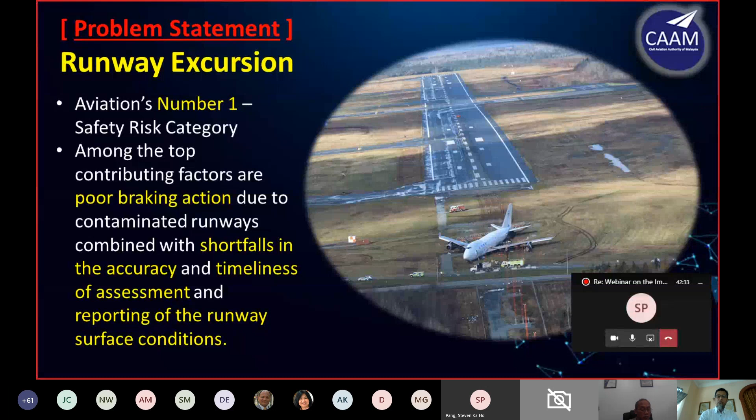What are the contents of my presentation? First, I will touch on what is RCR, Runway Condition Report. Second, I will tell about the objective of the RCR, and then benefits. What are the benefits of RCR? And then why RCR is very important. I will share a little on the challenges that we in Malaysia face when we implement RCR or GRF, and on the roles of agencies. As you know, when we implement GRF, there are various different agencies that have their own roles, so I will share a little on this matter. At the end of this presentation, I will share some ICAO provisions and guidance material that we can refer to, to ensure all the things we do are recommended or required by ICAO.

What is a runway condition report? It's a standard reporting of runway surface condition. Our airport operator, our aerodrome operator, has already done runway surface condition reporting, but ICAO, after introducing this GRF, wants to ensure all reports are in standard format. That's one of the reasons. Hopefully after this, worldwide everybody will report using the same format, enabling all users, the airlines, to understand easily because all are standardized. We don't want different methodologies of reporting runway surface condition. As we go on in this presentation, you will see it is very simple format. You don't have to write too long in words. It's very simple, so I will share with you after this.

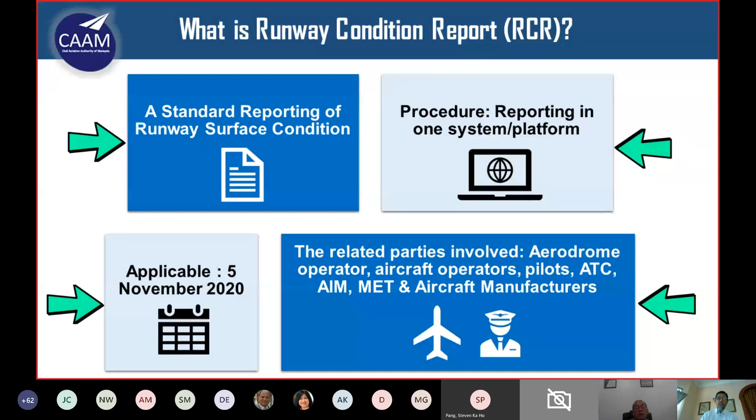What are the objectives of this RCR? The first is we want to assess and report the condition of the movement area. This is the major role played by all aerodrome operator staff, especially the aerodrome inspectors. After every heavy rain, they have to go onto the runway and do some assessment. I will tell you the detail after this of what assessments need to be done, and then they report in a timely and correct manner.

The second objective is to provide, after we have done all those assessments and measurements and produced the report, the assessment information in the correct format, which is the SNOWTAM format. The third objective is to report significant changes without delay. This is one of the purposes of GRF, to ensure we report any significant changes on our runway without delay. For example, in our region, after every rain, we will ask our aerodrome inspector or aerodrome staff to go onto the runway, do measurement, and as soon as possible, produce a report and submit it to the AIM or ATC.

Okay, what are the benefits of the GRF? First, of course, to improve safety by better understanding of runway condition. If everybody, the aerodrome operator, the ATC, the pilots, they have better condition of runway condition, so better knowledge about runway condition, so it will improve safety, thus it will affect in fewer runway excursions, like the first slide I showed you just now.

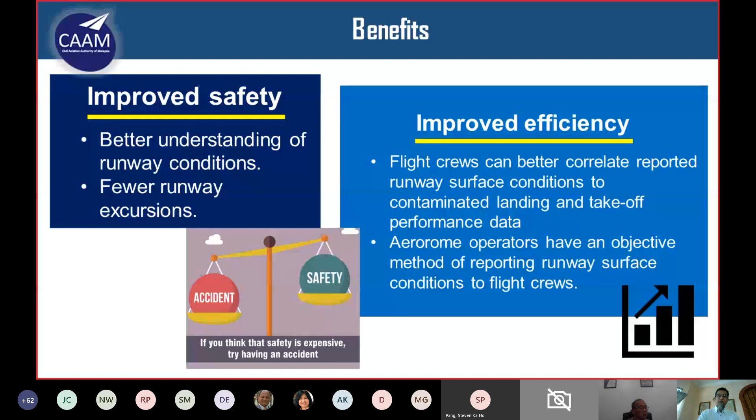Okay, why is the RCR important? First one is to standardize the reporting of runway surface condition. We will see several times, every time we talk about GRF, it is for the purpose to standardize the reporting of runway surface condition so that everybody will understand correctly.

The second one is to establish a common language between all related parties in airports with one system. Aerodrome operators communicate the same with aircraft operators, pilots, ATC, AIM, meteorology, etc. So everybody will use a common language for the condition of our runway.

Next one is to allow pilots to accurately determine aeroplane takeoff and landing performance. Like I said before, by receiving correct information in a timely, standard manner, hopefully using this methodology pilots are enabled to accurately determine aeroplane takeoff and landing performance - how much length of runway needs to be reserved for them to take off and land. So this is very beneficial. The information is very beneficial to the pilot to decide.

Sometimes only one-third of our runway - for example, KLIA has got 4 kilometers of runway - one-third, 1.3 kilometers, is not available. So the pilot will decide whether 2.6 kilometers is enough. So it's up to the pilot, but the most important thing is the aerodrome operator gives them the most accurate, timely manner of reporting of the condition of our runway.

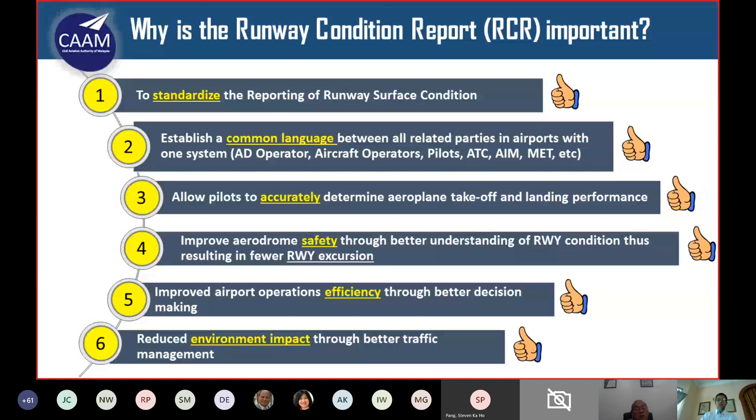Okay, what are the main agency roles? I can say very easily. The first one is the airports - of course the airports are the ones who start all this. Without the assessment of the airport, the report will not be generated. So the airports, or the aerodrome, will assess the runway condition and report using RCR.

The next one is the ATIS and AIS - the AIS will convey the information from the RCR to aircraft operators. And lastly, the pilots - they will use the information with aircraft performance data to determine if landing or takeoff is safe. So all these are the main agency roles.

Okay, before we start, let us see - let us make it easy for us to understand. There are two types of runway, I mean two types of locations where runways are located. The first one is in areas where the airport is exposed to snow and ice. For this type of airport, they need to use the full global reporting format, the runway condition code 0 to 6, so they have got no excuse. After this I will show you more detail.

But in Malaysia and our neighboring countries, we just consider a simpler version, the RCAM, runway condition assessment matrix - I will show you after this. Because why? We are not exposed to snow and ice at all. So this is our area, so we use only the section of the global reporting format related to water as contaminant.

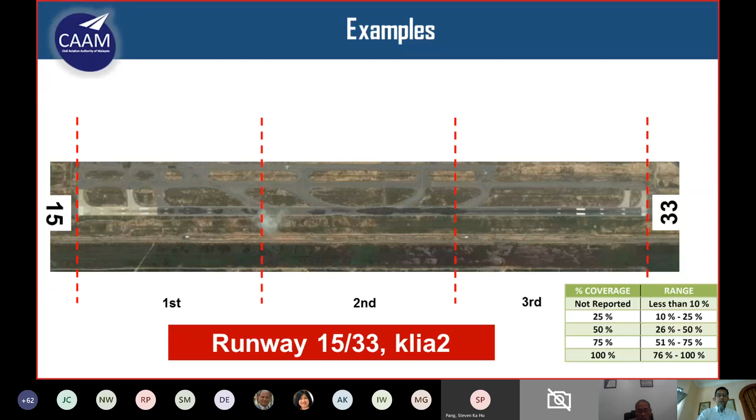Step 1, for example, if we go to the first third, first of all we have to measure the percentage of contaminant. There are 2 ways of measuring. If your runway is busy, so you have got no leisure to spend your time on the runway, you must train your staff to measure it as fast as possible.

What we give as tips to our aerodrome staff is that you just estimate. Believe me, 10% is very big. So it's very rare in our country, I'm not sure about your country, it's very rare for our runway to reach 10% and above. Usually it's 10% or below.

So it depends on how busy your runway is. If your runway is busy, I would suggest just train your staff to estimate - oh, this is around 8%, 9%, 10%. You have got no choice. For example, in KLIA, if you have to measure after every rain, you take out your measuring wheel, come on - all aircraft are already waiting to land, right?

So it depends on the condition of the runway. But if you have an airport like Malacca airport in Malaysia which is not that busy, take your time. You step at a water ponding, you take out your measuring wheel, for example, you just measure and then you report.

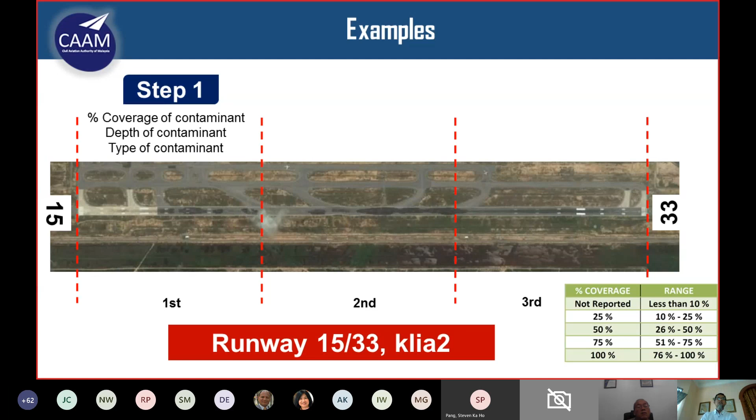It will depend on how busy your runway is. And the second thing you need to measure is the depth of contaminant. This one you cannot estimate - you have to go down, take a very accurate ruler, and measure the depth of the contaminant. For example, for our case it is just water. And then the third one is you must decide the type of contaminant. Like I said before, in Malaysia and neighboring countries, the only contaminant that we consider is water after heavy rain.

Similarly, after that, you do the same for the second third of the runway, and then the third part of the runway, and then you must go out as soon as possible, or else ATC will get angry with you.

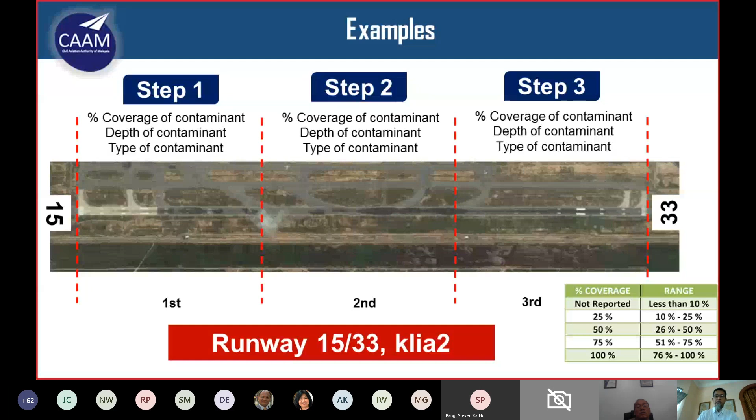In this slide, you can see one example given by ACI. I recommend to all of you, if you have got the opportunity, attend ACI CBT, computer-based training, or online training. Previously we had difficulty in Malaysia - all our staff, including me, found it very difficult to understand. During last year's ICAO seminar we got some idea, but when we go into detail, it's quite difficult to understand. After we attended this ACI training online course, which costs a little bit, very minor, we discussed among us and now we understand. So basically, the form you see on your right side is not the one that will be submitted to the ATC or AIS.

Please do not submit this form to the AIS. They will say, what is this form? This is not the one that should be sent to AIS. This is the form that needs to be filled by your aerodrome staff. You must train your aerodrome staff how to fill this form. After they fill it completely, they will summarize it and transfer it into SNOWTAM format. The SNOWTAM format is the one that will be sent to our AIS office.

What we'll do with this form, after we complete it, is put it into our file neatly, so that for further reference, in case anything happens, we have got the proof, the record, the further details of the measurement. Everything is mentioned in this form. But to ensure your staff know how to fill this form, you must train your staff. I will share on my second slide how we manage to train our staff using this form.

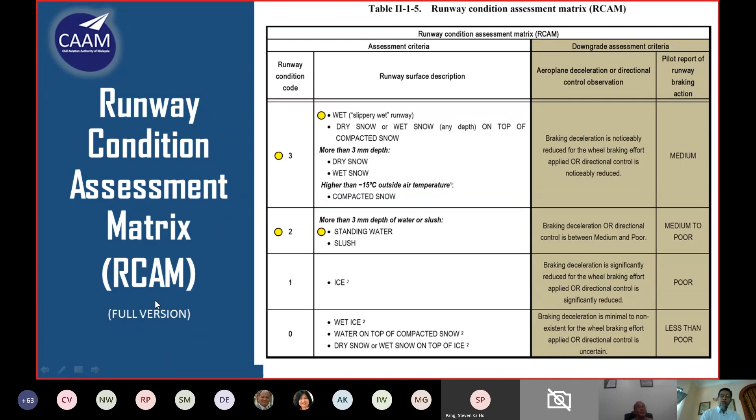But next, runway condition 1, why don't we consider it in Malaysia? Because it's just talking about ice. Similarly, runway condition code 0 is talking about wet ice, water on top of compacted snow, dry snow, or wet snow on top of ice. That's why I'll go back again to our simplified version. We just consider initial assessment only: runway condition code 6, 5, 3, and 2. Understand? So you can see we just take out number 4, 1, and 0, provided that your state doesn't have snow. If your state has snow, please do not do like us.

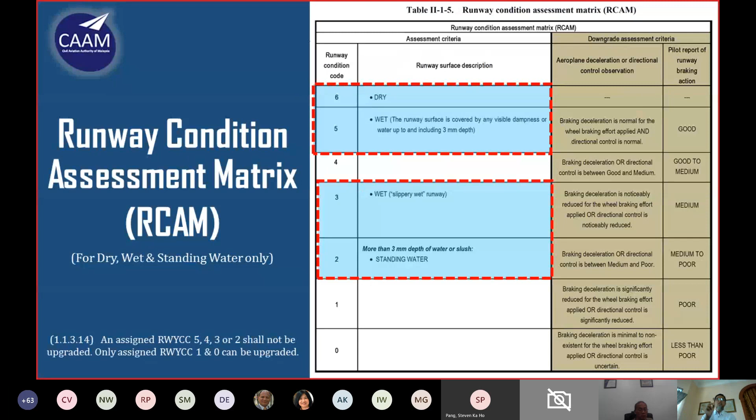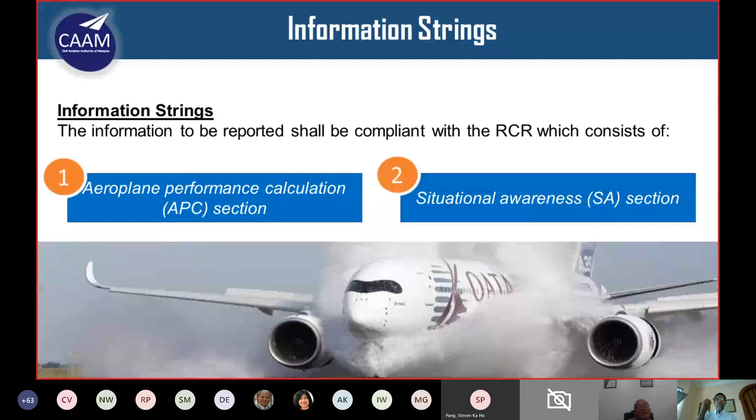Okay, let us go into more detail. Under RCR, they have strings, divided into 2 strings. The first one is what we call the aeroplane performance calculation section. Because we in Asia find it quite difficult to pronounce English, I shortened it to APC, instead of saying aeroplane performance calculation section, we just put APC. Easy, right? The second part is situational awareness, SA. So the first part is APC, the second part is SA. I believe they understand. What are they? I'll show you after this.

So I'll show you by giving an example. Can you see on the bottom right side? This is one example I extracted from a document called PANS AIM, document number 10,066. Here you can see which one is the APC - this part is the APC, the first part, this is the output of the SNOWTAM. And which one is situational awareness? This is what we call situational awareness, the output that needs to be seen by the users, the airlines, the pilots. I'll show you the details after this, don't worry.

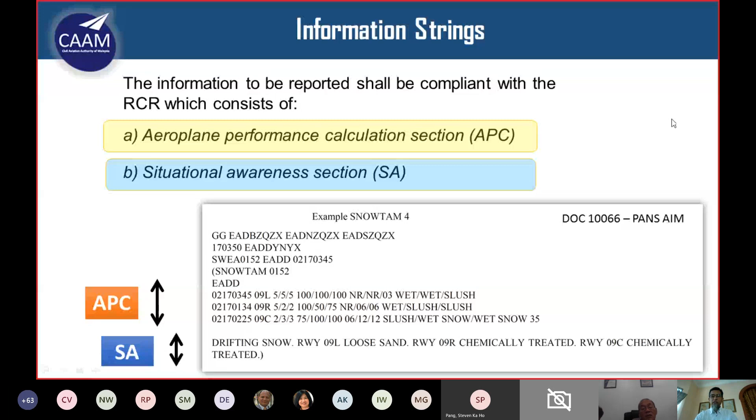Please take note, this example is for an airport, an aerodrome which has 3 runways. If your airport has only 1 runway, you have only 1 line here - quite straightforward and simple. Like I said before, pilots only need to see this, they can already judge their braking action, stopping action, etc. Very easy, it makes your life very easy. Hopefully, yeah. Okay.

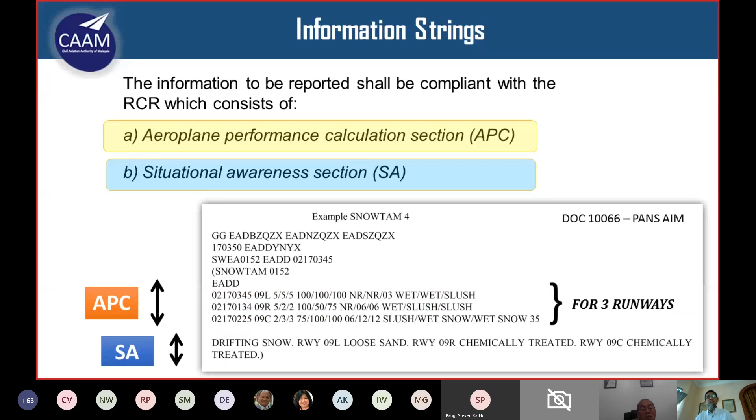Okay, let us see the first part of the APC. Can you see the logo on the top right side? I just Googled it, 811. We always see 711 in our country, but for GRF, we change to 811. Why? Because the APC part has 8 elements and the SA part has 11. So very easy to remember, 811. But don't mistake it for 711, okay?

So what are the 8 elements or items of APC? The first one is the aerodrome location indicator. Can you see on the right side? It is M, meaning mandatory. So you have no excuse when you declare the first string of this APC section - aerodrome location indicator shall be mandatory. The next mandatory item to declare is the date and time of assessment. Please remember for SNOWTAM you just need to declare the month and the date only, you don't have to declare the year. I'll show you the example after this to make it easy to understand.

Next, we must mandatorily mention the lower runway designation number. For example, if your runway is 1533, you put 15 only, not 15/33. If your runway is 14R/32L, you put 14 right, not 32 left. I'll show you the example after this. This is mandatory, we must declare it.

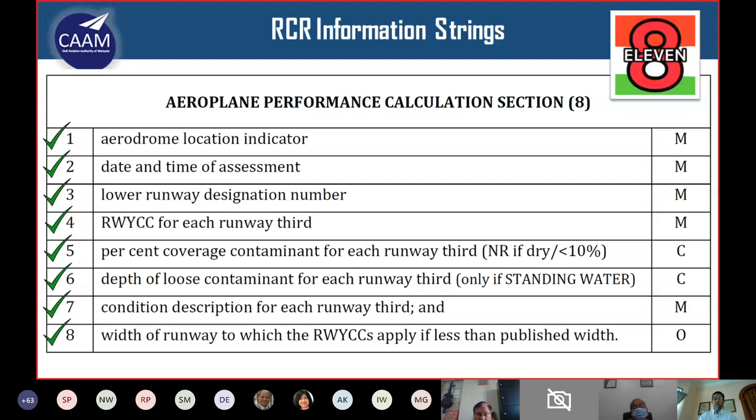This is mandatory. And the last one, the eighth, is optional - the width of runway to which the runway condition code applies, if less than published width. For example, if your runway is full with snow or ice, but we don't have that case, your tractor only manages to clean the middle. If your runway is 45 meters and only the middle 30 meters is cleared, you put 30 here. But it's optional - you can declare it or not. In Malaysia and neighboring countries we don't have ice, slush, or snow, so we just leave it blank.

The second part of the runway condition code string is what we call the situational awareness section, or SA. There are 11 items, but most are optional - only one is mandatory, one is conditional.

The first one is the reduced runway length. For example, if your runway is 4 kilometers, or say 3 kilometers, and the first third of the runway is full with water, you may declare the LDA as just 2 kilometers. So here you put LDA available is 2000. I'll show you the example after this. But if the full stretch of runway, the full 3 kilometers, is available, you just leave this section blank. So this is conditional, depending on whether you have the full length available or only part of it.

The second part is not relevant to our area, but I'll mention it - if you have drifting snow on the runway, you put drifting snow, so the pilot will know. The third part is loose sand on runway - if you have loose sand, you put loose sand on runway. But like I always tell my airport operators, if you have loose sand on the runway, please clean it first. I'd rather you clean it first than publish to the pilot. Clean first, then don't publish anything.

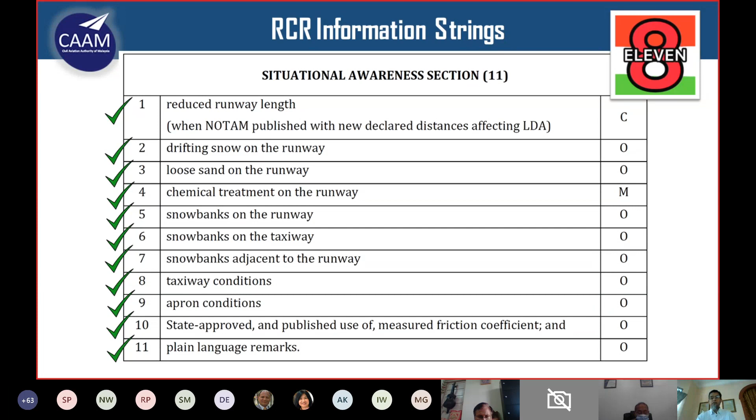To get us more detail and more idea, remember, I will give you example one by one. What are the 8 items on the APC?

Okay, the first one is WMKK. Remember, this is mandatory, the aerodrome location indicator. So in KLIA, the aerodrome location indicator is WMKK.

The second part, which is mandatory, is the date and time of assessment. Okay, before I forget, please bear in mind, for the APC section, all items are separated by a space, a blank space here. But for the SA, situational awareness, all items are separated by a full stop. That's the difference. We can see an example after this.

Okay, the second part is the date and time of assessment. Remember, I said just now, when talking about date, you must start with the month, not year. 0925 means 25th of September. And then it is followed by the time of assessment. 1400 means 1400 hours in UTC. Remember, don't put your local time.

1400 in UTC. Okay, the third part is the lower runway designation number. Remember, after this, when talking about GRF, we always declare the lower runway designation number, not the direction of landing or takeoff, but always declare from the lower runway designation number.

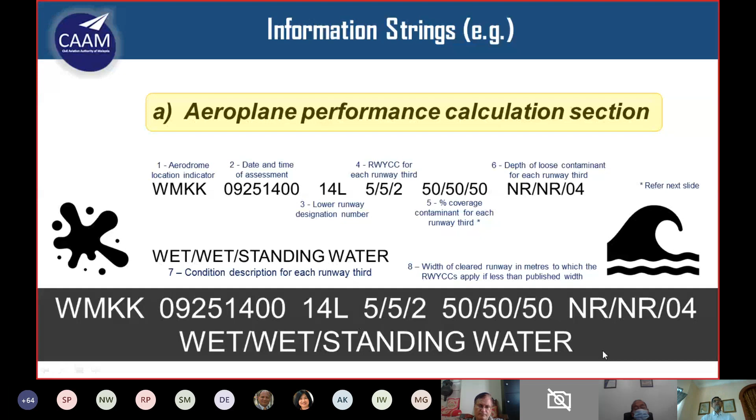So let me elaborate more on number 5, which is the percentage of coverage of contaminant. You can see here this example. If the first third of the runway is less than 10%, you just put NR. If it is, for example, 9%, 8%, you don't put 09, 08, 07. You must put NR. Similarly, second third of the runway NR, third of the runway if is less than.

Another most important thing you must know: if for example you estimate or measure the percentage of contaminant is 20%, please do not put in your SNOWTAM format to become 20%. You must round the value to become 25.

For example, if you estimate the percentage is 40%, don't put 40. You must put 50, you must round it to become 50. For example, here, if you have estimated 60%, don't put 60. You must round it to become 75.

And then last one, for example, if you have estimated 85%, don't put 85. You must round it to become 100. So these are the area. For example, if we see the SNOWTAM to become 30, 40, 40, so it is wrong. You must round it to become 50%.

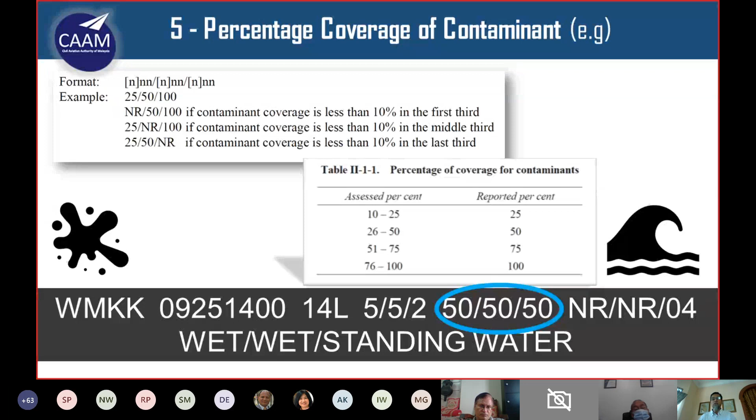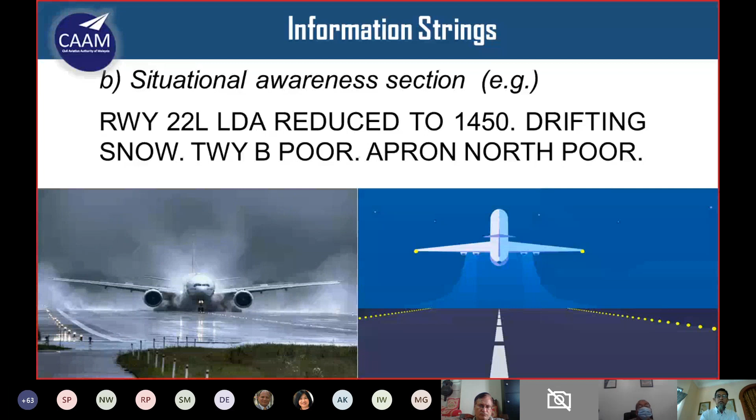Understand? Okay, let us go to the second part of the strings of the RCR. We call it the situational awareness section. Okay, let me pull out the previous table. You can see here what are the things that we declare under this example?

Airport operator only declared the first part here, which is reduced runway length. Runway 22L LDA reduced to 1450. Maybe the full length of the runway is 2 kilometers, but some part of it is not available.

So in this situational awareness, it is conditional for you to put this statement: runway 22L LDA reduced to 1450. It means the pilot understands that your runway available LDA is only 1450 meters. Remember, it must be separated by a full stop. Full stop here, you can see.

Okay, the second part is drifting snow on the runway. So if you have drifting snow on your runway, you just declare drifting snow. Pilot will know, okay, there's drifting snow on your runway. Okay, and then you see the example here.

The airport has decided not to declare because they don't have loose sand on the runway, they don't have chemical treatment on the runway, they don't have snowbank. So they skip all and start declaring the next one, which is the condition. So here in this airport, the pilot knows that only taxiway Bravo is poor, maybe some part of it is being soaked in water.

And then the next example is apron condition, apron north poor. So pilot knows that, please be aware that the north apron of this airport is not that good. Maybe some area is soaked in the water, but the southern part is okay.

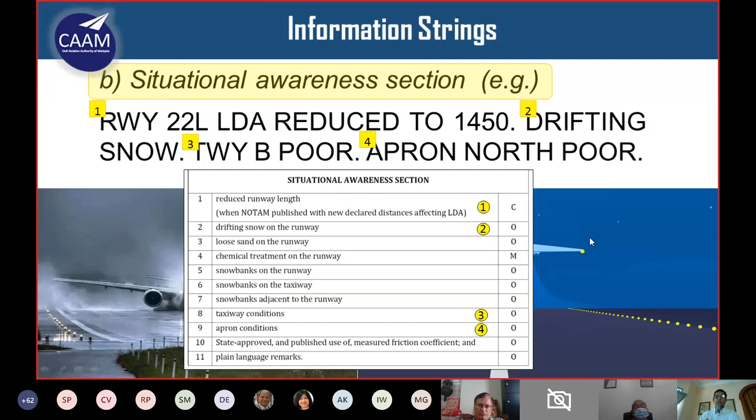So like I said before, most of the items in situational awareness are optional. You may declare or you may not declare, but in this example, the aerodrome has decided to declare only 4 of the items. Okay, this is the SNOWTAM format that will be submitted to our AIS office.

So please make sure we train our aerodrome staff, our aerodrome personnel, especially on the aero operation side, how to fill this SNOWTAM format. Actually it's not that difficult. After we have trained our staff, we can say it's not that difficult.

But to make it not difficult, you must attend the training by ACI, I recommend, okay? So it's not that difficult actually. I think it's much easier than the NOTAM format, if I'm not mistaken.

Okay, so you can see here this example, where you can get this example. You can get this example from PANS AIM, DOC 10066. So lately, ICAO has transferred most information of the SNOWTAM and NOTAM to this new document, PANS AIM. So if you refer to Annex 15, not many mention about SNOWTAM. So you must refer to the DOC 10066, which is the name PANS AIM.

So you can see here, it is applicable as of 5th November 2020. Inside the same document, there is a SNOWTAM format which is applicable before 4th November 2020, and this is the current SNOWTAM format. But for the GRF, please make sure after 5th November 2020, you use this new format. It's a little bit different. The below part of the SNOWTAM format looks like this.

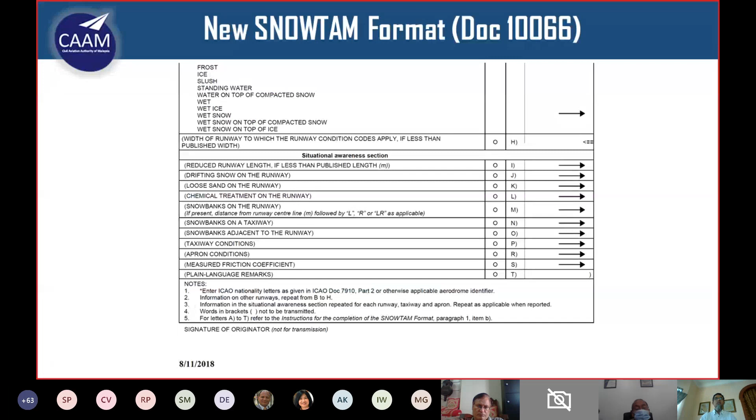It's not that difficult. If you train your staff, you can see it's manageable. So we managed to train our staff. This is the one you must train your staff to fill, and this is the output that you must send to the air traffic controller or AIS.

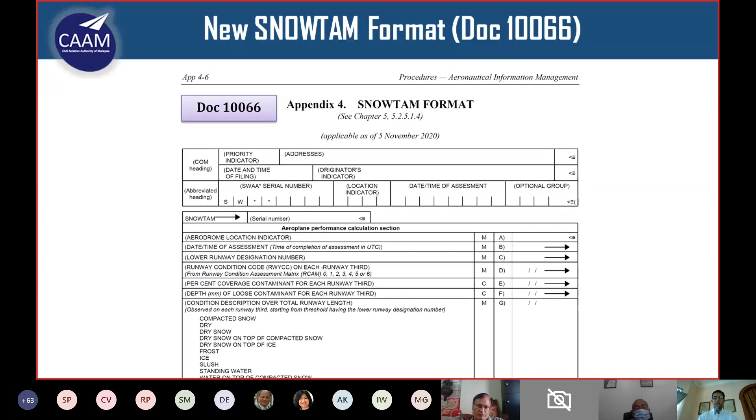I always want to share with you the challenges we faced during implementation. The first one is the RCR should contain all necessary information for the definition, etc. If you send your staff for training and attended this short training, you should have some idea what GRF RCR is all about.

The second challenge is aerodrome personnel should have the skill and knowledge to assess the condition of the runway and produce an accurate runway condition code. This also you have to train your staff on. You have to train your aerodrome staff how to accurately determine the condition of your runway.

The third challenge is coordination with relevant parties. Please bear in mind, not only the aerodrome operator is involved in this GRF, you must coordinate with the airline operators, the air traffic controller, and the AIS. They must also be in the loop.

You must have some session with them. Tell them this is effective from 5th November 2020. Please do not be surprised if we submit some form, and please do not say 'why are you submitting SNOWTAM, we don't have snow here.' So please make sure from now you share with your pilots in your country, and also the ATC and AIS, so they don't get surprised when we submit the new format on 5th November. You must know what to do.

These are the challenges that we need to ensure are addressed. Next is the establishment of the Malaysia standard reporting format. Since last year we have sat together and drafted all this reporting format, still in draft stage.

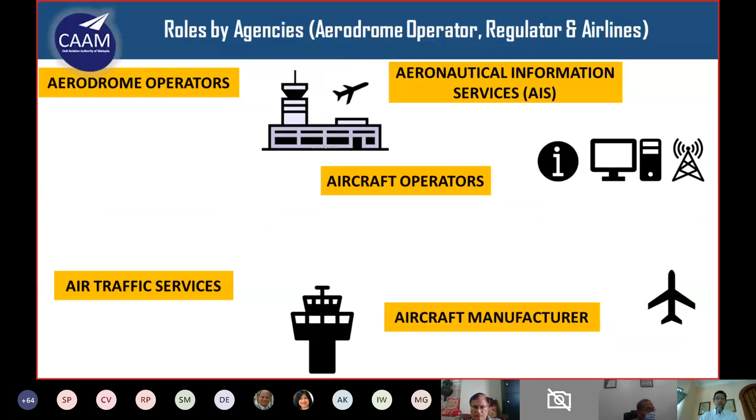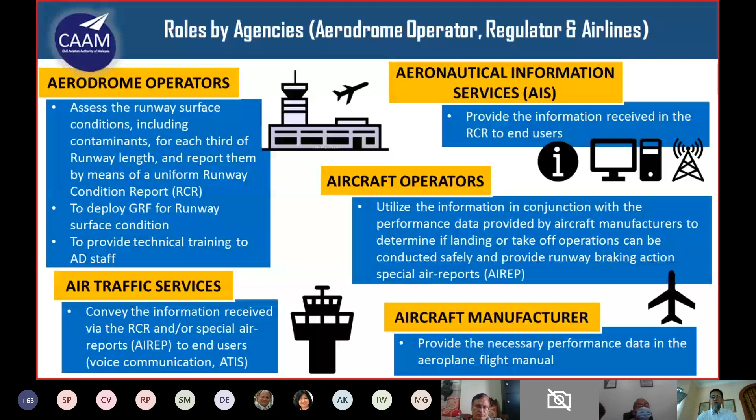So what are the roles of different agencies? The aerodrome operator assesses the runway surface condition, deploys the GRF, and provides training to aerodrome staff. Air traffic services convey the information received via the RCR or the AIREP. The aeronautical AIS provides the information received in the RCR to end users. The aircraft operators utilize the information in conjunction with performance data provided by aircraft manufacturers, and the aircraft manufacturers provide the necessary performance data in the aeroplane flight manual. These are the roles of the different parties involved in GRF.

I would like to share a little about some of the ICAO provisions and guidance material relevant to this GRF. The first is Annex 6, which covers the new Part 2 Aeroplane Performance Manual, Doc 10064, on new assessment by the pilot in command of landing performance and reporting for commercial air transport operations. All pilots, beginning November 2020, must be well trained and have access to this new part of Annex 6. The next is Annex 8, concerning the nature of information provided by aircraft manufacturers—if you have a manufactured aircraft, you must consider this requirement.

So mostly in our area, we consider this document Annex 14 Volume 1, applicable from 5th November 2020. The 8th edition is the latest one, but inside this 8th edition, some areas are applicable before 5th November, and some after. So make sure after 5th November, you just consider the one that is relevant. But for now, don't consider the parts applicable after 5th November first.

This Annex 14 Volume 1 is the fundamental provision for assessing and reporting runway surface condition. Some part of it tells about RCR, but most of this GRF RCR is mentioned in PANS Aerodrome, Doc 9981. If you have access to this 9981, it tells about everything: aerodrome certification, safety management system, safety assessment, aerodrome manual criteria, and including this GRF matter. It's very important for you to ensure your aerodrome staff is trained in 9981.

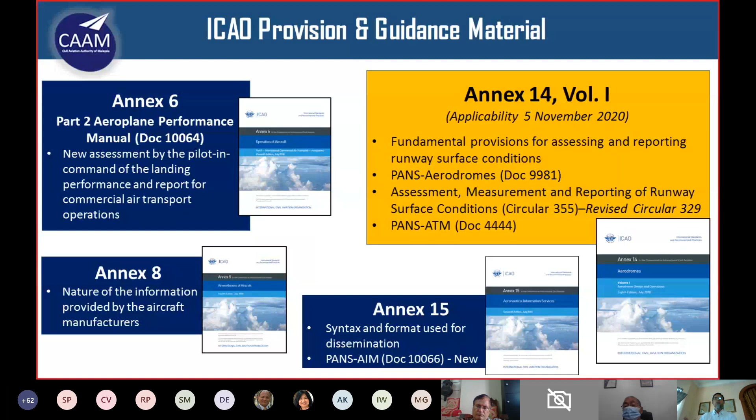The next document that might be relevant is Annex 15, but like I said before, in the latest edition most of the content related to SNOWTAM and NOTAM has been transferred to Doc 10066, the PANS AIM. So make sure you have access to the PANS AIM because it tells you how to actually produce a SNOWTAM format.

So roughly this is the provision: Annex 14 Volume 1, Doc 9981, Doc 10066, and ICAO Circular 355. We must ensure our staff are well trained on all this documentation. So thank you very much.

Please allow me to share a little bit on my second presentation, which tells about the implementation program in our country.

The title of this slide is GRF, RCR, and Runway Inspector Program. So we have decided in Malaysia, even though it's not required by ICAO, that alongside this GRF, we will certify our runway inspectors or site inspectors. ICAO requires all the aerodrome inspectors, runway inspectors to be trained. So we have decided in Malaysia that we must issue them a certificate.

We go alongside. So the main objective is to ensure aerodrome personnel are trained in the relevant fields of competence, and their competence verified in a manner required by the state, CAAM, us, to ensure confidence and accuracy in their assessment. It is mentioned in Annex 14 Volume 1, Section 2.9.4. So if I go to the audit, I want to see, can you show your certificate as runway inspector? If he manages to show it, signed by us, CAAM, it means this particular inspector has already undergone all the necessary training that we have put into the condition.

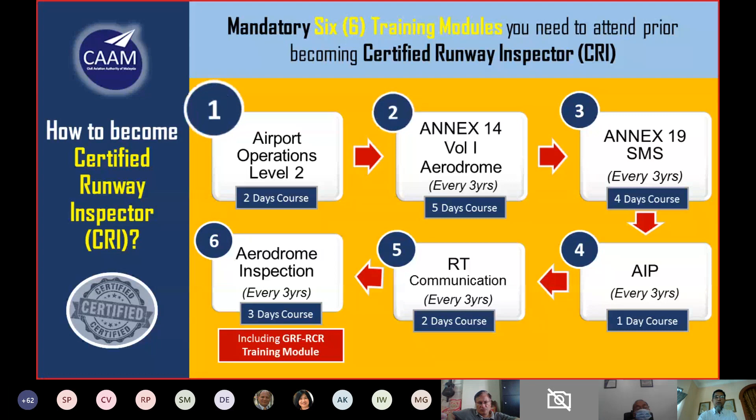Some of them, the validity is every 3 years, so every 3 years they are required to refresh the training. If you complete all this training, we will issue a certificate.

These are the training modules: Annex 14 Volume 1, Annex 19 SMS modules, AIP modules - we train them how AIP is related to aerodrome. The RT module - we mandate everybody, runway inspectors must have very good RT phraseology skill. And this is the aerodrome inspection module, which you can read after this.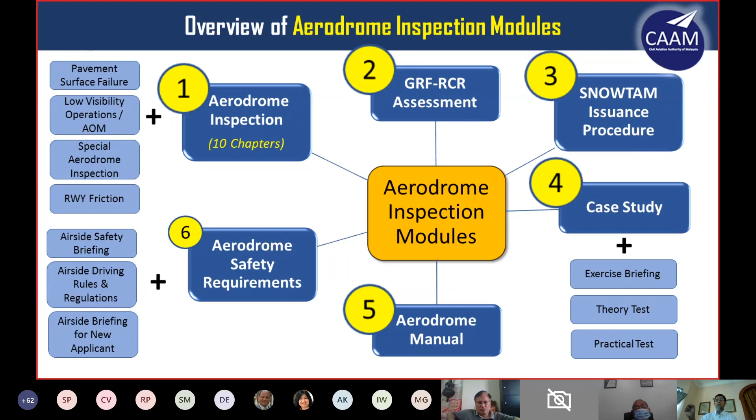Talking about GRF, RCR - we train our staff here in SNOWTAM issuance procedures. We do some case studies. And we train them on the aerodrome manual, because the aerodrome manual formatting is a little different from 9774 to 9981, so we train them on the new format inside the 9981 PANS aerodrome. And aerodrome safety requirements, all those kinds of things we train them.

So these are the modules inside the aerodrome inspection modules, and these are the GRF RCR modules. It's around one day, 1.5 days. These are the training sessions.

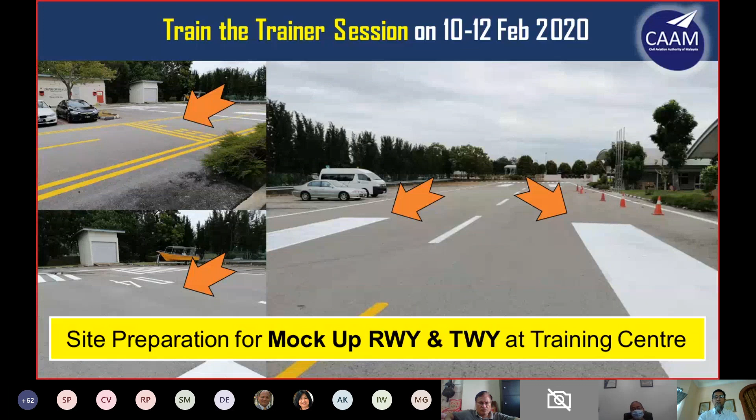This is the one that I love most, because they managed to do a mock runway. It's not as big as a runway, but they built the mock runway beside their training center so they have some feeling. You can see here there's a runway holding position marking, a runway designation marking, and a mock aiming point marking here.

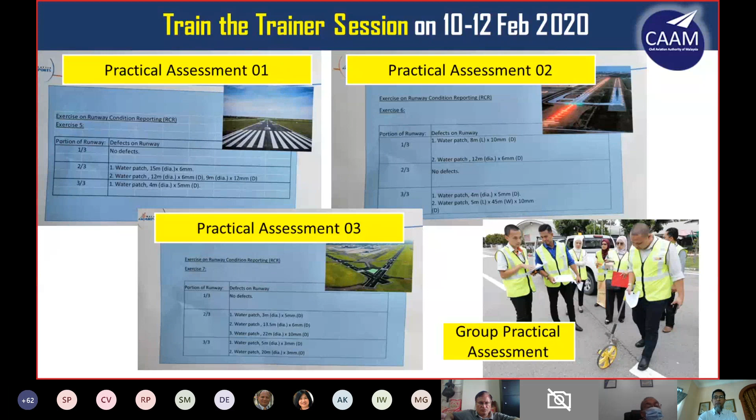So these are the practical assessments. We train them how to fill the form, and we train them how to measure using a wheel, provided your runway is not busy. For the on-site assessment, everybody - all the airport managers - go down and learn, because after this they are expected to train their own staff.

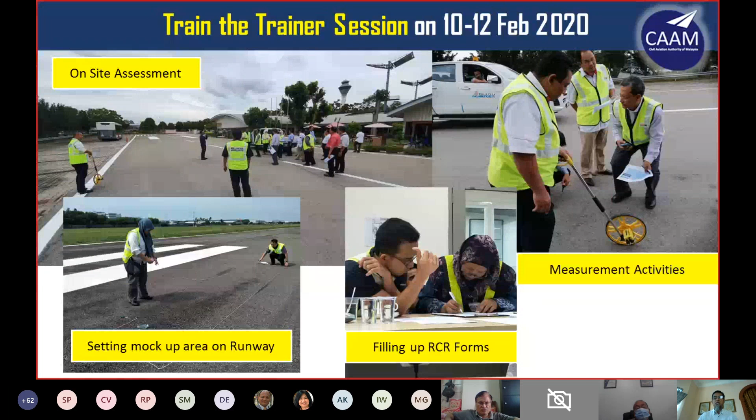So we simulate the mocking area there. We don't pour water, we just put a bottle and put a border to represent the water - that way you have got more time to dry it out. After all the assessment is completed, you train your staff to fill the RCR form. So CRI is requesting approval, with somebody on the other side of the walkie-talkie acting as an air traffic controller, so the driver requests approval before entering the runway.

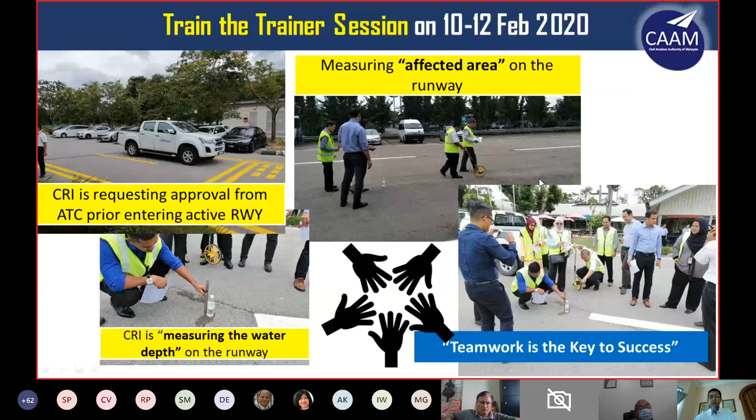I think that's all. I'm sorry, Mr. Punya, I took some of your time. I hand over back to you. Thank you very much for listening to my speech. Thank you.

Thank you very much, Mr. Mayudin. It was a really excellent presentation. And I see in the chat box there are not many questions, so that makes me feel your presentation was so clear - everybody understood what they need to do before 5th November 2020.

So however, we got a few questions, let me see. We have questions from Samoa, India and Nepal so far, but we still have time - you can post into the chat box. Regarding the question from Samoa, there is a message from Michael Bredenberg. I hope the response to your question helps. If the information provided by Michael Bredenberg is helpful, I don't think it needs to be clarified by the speaker or the ICAO auditor. So let's go to some other questions where we have not seen clarification in the chat box.

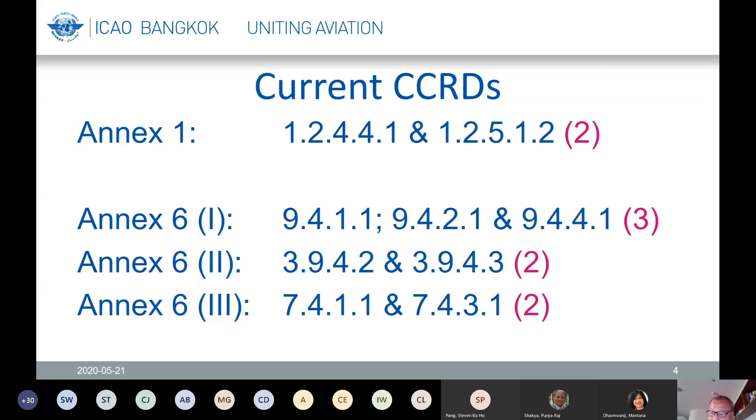I give you the example that is filed by Cambodia. By the way, all this information is public information which is accessible through the online framework, so there's no secret. I just picked Cambodia as one of the examples to show how the differences for this particular annex provision is filed.

So for recognition of other state differences, Cambodia has accepted other ICAO contracting state members' differences. So with this knowledge now, if another country's airlines would like to start operating flights into Cambodia, they know at least there is no lesser consideration with Cambodia as far as the crew licensing regarding this particular provision is concerned.

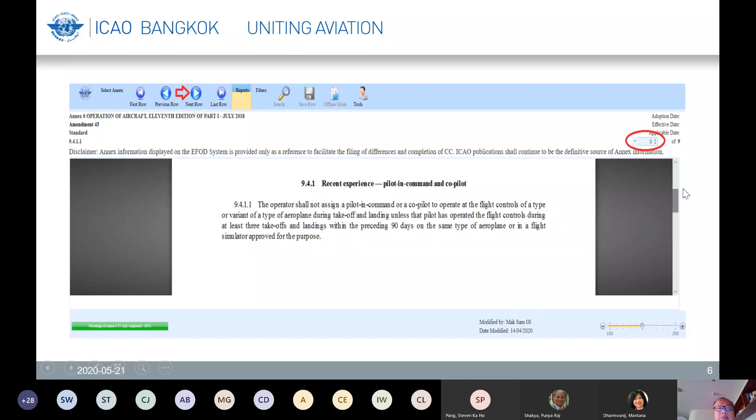Okay, so I'm done with the filing of the differences. Now I'd like to go on to the online framework, the new application regarding the CCRD and the EFOD report. There are 2 parts to this. One part is report by states, and we are talking about all the ICAO member states, 193 members, on the left-hand side, and on the right-hand side is report by regions. So you can customize it a little bit, from all the states in the world to regions.

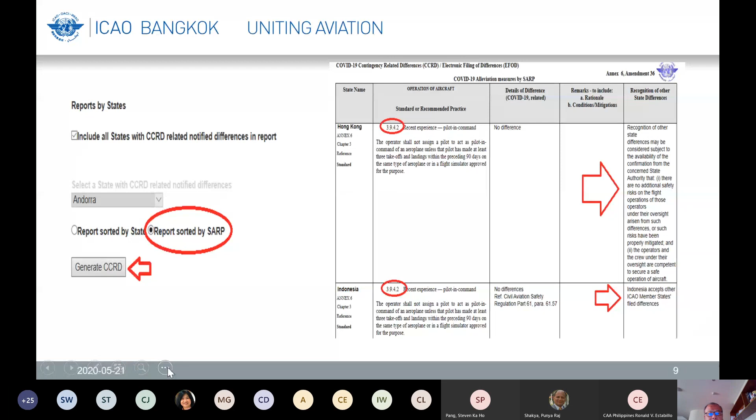Okay, any questions so far? Okay, with that, I think I've got nothing further to add.

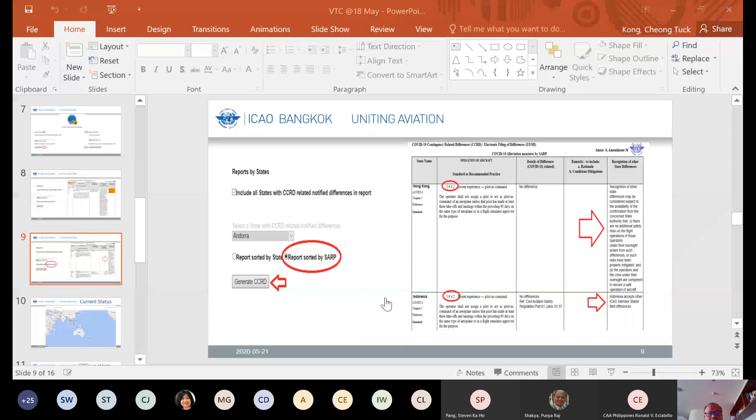And let me go back to the meeting. I hope that would help provide a little bit more information on how a state may work on the CCRD. Currently, quite a lot of states in the APAC region have completed and submitted the CCRD. What we are seeing is those states that have not completed CCRD are mainly from the smaller Pacific Island states. So I hope the short briefing provided earlier would provide some clarity and some encouragement.